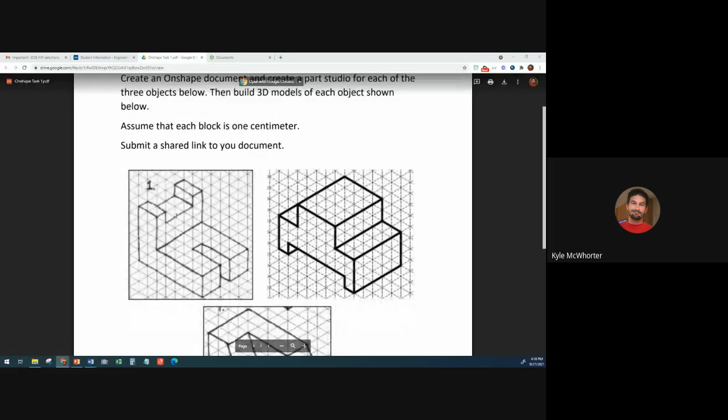So you're going to go to OnShape.com from your dashboard. You're going to select Create and Document. We're going to create a new document and call it Task 1.

So we have our first part studio right here. We're going to make this part, starting by drawing this L shape on the front view, and then we'll extrude it back. The dimensions are: the height is 5 centimeters high, the thickness here is 2 centimeters, and the width is 7 centimeters wide.

So we're going to come in here and start a sketch on the front plane. If we push N on the keyboard, it'll give us a straight-on or normal view. You can also push P on the keyboard to make all the original planes disappear. We're going to get the line tool here.

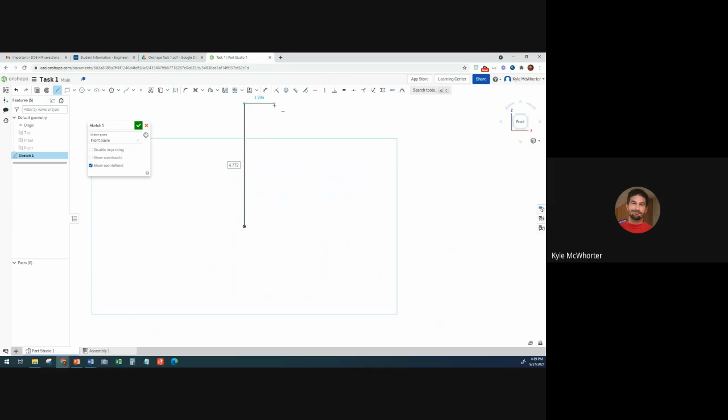I'm going to make, starting from the origin, sure that it's locked vertical. My height was about 5, so I'm going to go up till this thing says about 5. Then I'm going to go over about 2. Oh wait, I haven't changed my dimensions yet, so hang on just a sec. I'll make the L shape here.

Notice that you can get it to light up - that says it's the same level. Then click.

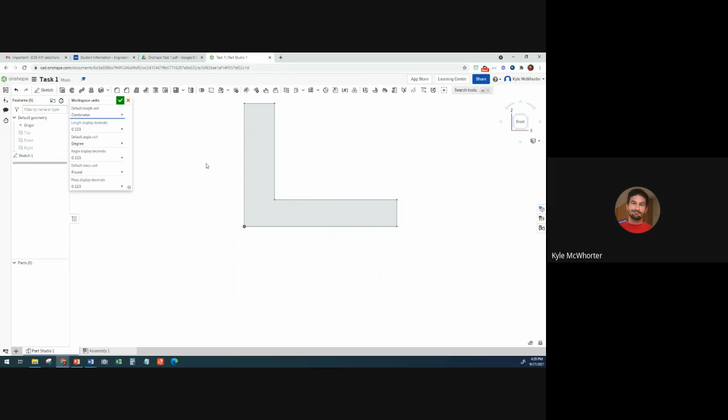Okay, so I'm going to go to this little menu up here and change my workspace units to centimeters. And then I'm going to use my dimension tool - oh, that kicks me out of the sketch. So I'm going to have to double click on sketch 1 to get back into it.

Now I'm going to put some dimensions on this. And if we look back, the height was 5, the width was 7.

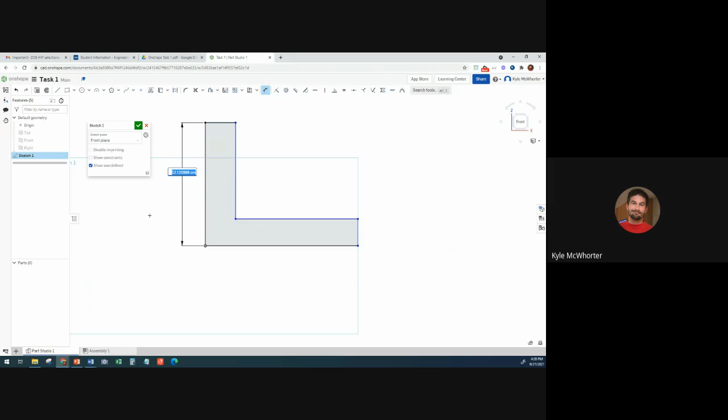So I'm going to get my dimension tool here. This one, I'm just going to select that, and I'm going to call that 5 centimeters. You can just push 5 and hit enter.

The width here was 7. And then that was 2 centimeters thick. This was also 2 centimeters.

And now all of our geometry has turned black to indicate that it's locked in place, fully defined. If you try to grab and move stuff, you can't move anything around.

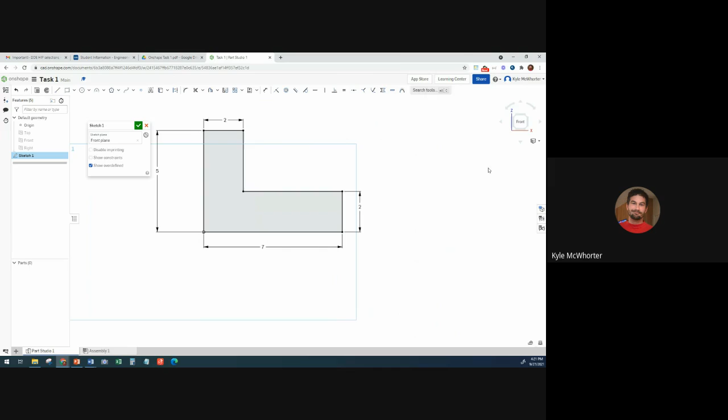We have the right dimensions, so we're just going to accept that sketch, and then we're going to extrude a depth of 5. So I'm going to angle this a little bit so that you can see. I'm going to accept my sketch.

Then you can pre-select if you want - maybe it won't let you. But when you first click on the extrude button, it asks you in blue right here, faces and sketch regions to extrude. So we're going to click in this area here, and you can see it starts to give it thickness. You can change the direction that it extrudes in by clicking on this arrow here or this arrow here. And the depth is going to be 5 centimeters. And then we'll go ahead and click to accept that.

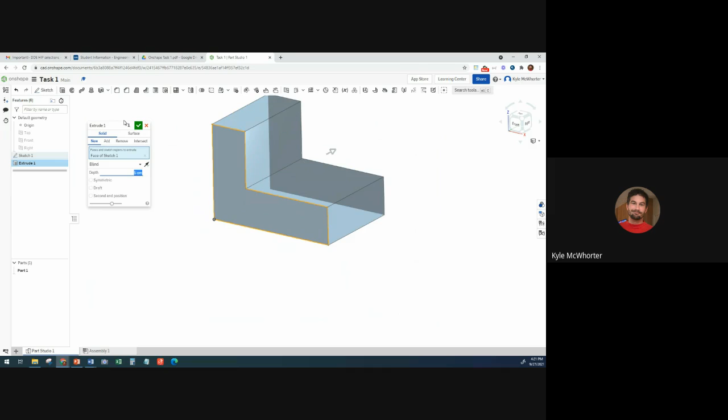So now we have the solid L shape, but we need to make this cutout at the top and this cutout on the side here. So for the cutout on the top, it's 3 units wide and 1 unit down.

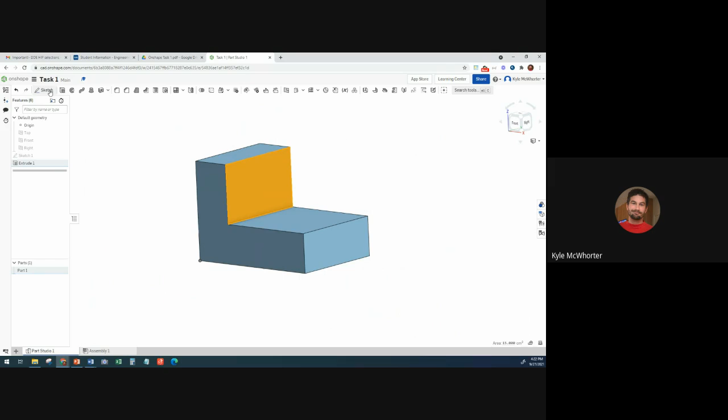So what I'm going to do is click to select that face right there, and then push sketch because now I can build a sketch on that face. I'll push N on my keyboard to get the straight-on view. This time I'm going to use my rectangle tool, corner rectangle, and place one corner up here, click, release, and then place another corner over here. Now I need to use dimensions to get that to look right. So this is 3 centimeters.

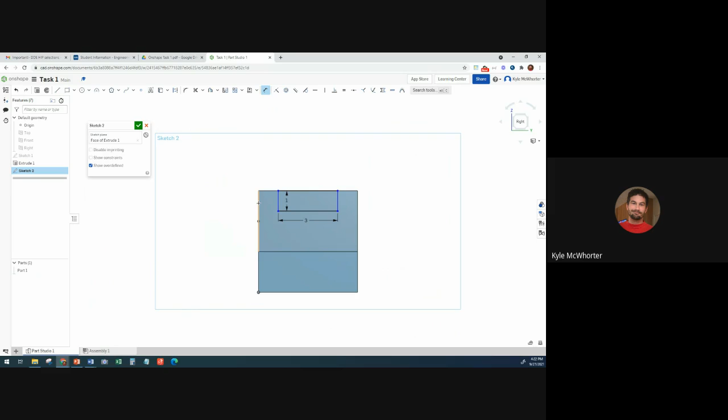This is 1 centimeter. Right now my rectangle's size is determined, but its location is not. So I can use a dimension to determine the location, and it's from here to there should be 1 centimeter. Now we've got our sketch fully defined here, so I can accept it.

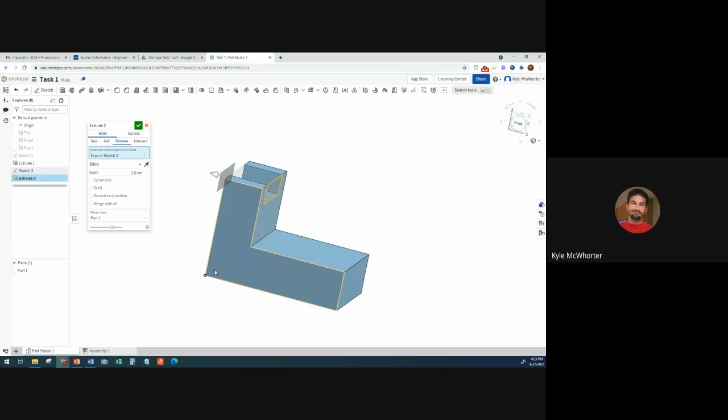I'm going to select that little square rectangle, select extrude. Notice it wants to build out, but I want to remove that. I want to cut it away, so I'm going to go like that, click on remove. Then instead of telling it how far to go, you can just tell it to go through all, and it'll just cut through whatever you have.

All right, now I just need to make this little cutout here. So that's 1 centimeter wide and 1, 2, 3 centimeters deep.

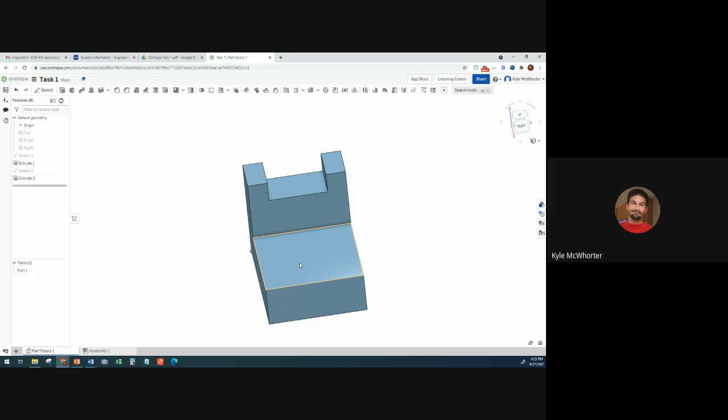I'm going to select that surface to make a sketch. Push N to get straight on view. I'm going to use my rectangle tool again and put some dimensions on it. The thickness is 1 centimeter.

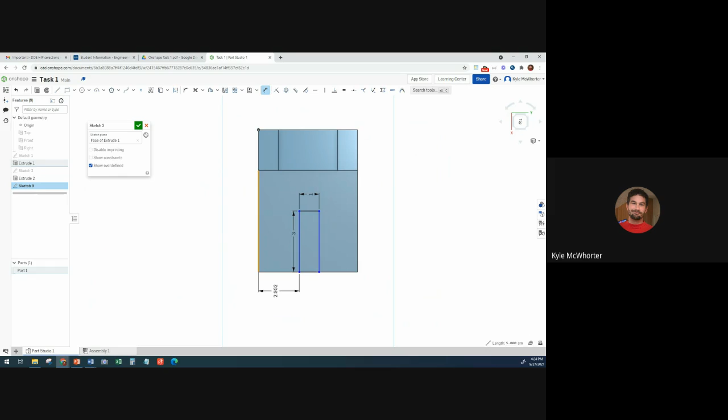That's 3 centimeters. Then I need to tell it where its location is - the size is right now, but I need the location. That should be from there to there, should be 2 centimeters. Now we're locked into place there, so I can accept that sketch.

Select that region, click extrude, change it to remove, through all, and then accept it. Now you see we've got our object there.

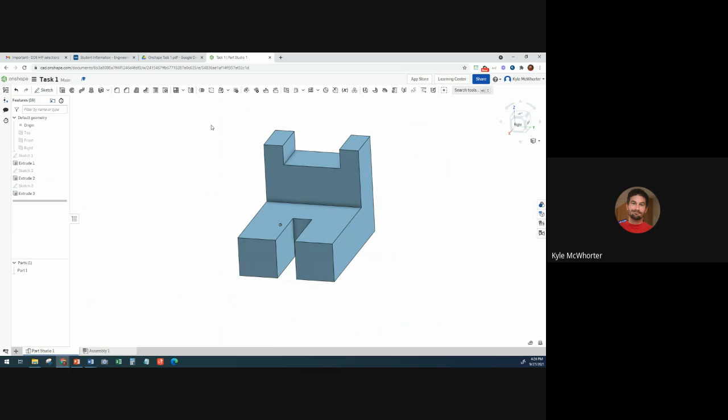Okay, the next one we're going to do is this guy right here. What I'm going to do is go down here and create a new part studio. So you click on the plus sign, click on create part studio, and now we have a new part studio to start in.

So I'm going to start by making this shape, and then I'll extrude it back 1, 2, 3, 4, 5 centimeters. I'm going to select the front plane and make a sketch on it.

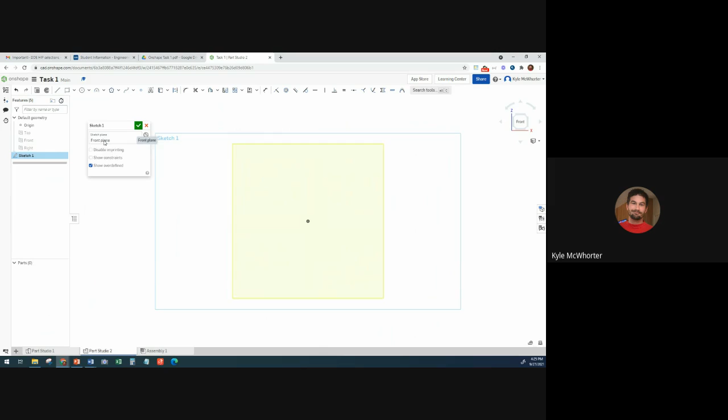N to get the normal view, P to make all the planes disappear. I'm going to get my line tool and starting from the origin, I'm just going to - oops, that should have been vertical.

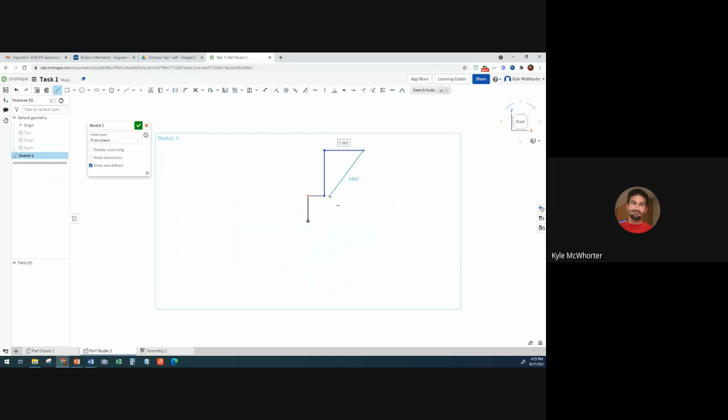Now I have it locked vertical. That's horizontal. That is vertical, horizontal, vertical. But you want this thing to pop up here so that it's at the same height.

We go up, over, down. It's okay if you get this little yellow stuff showing up, because that'll just make the bottom the same height. But you want to make sure that when you're placing this point that you don't make it vertical to that. This point here needs to not be straight below that - you don't want that point and that point lined up.

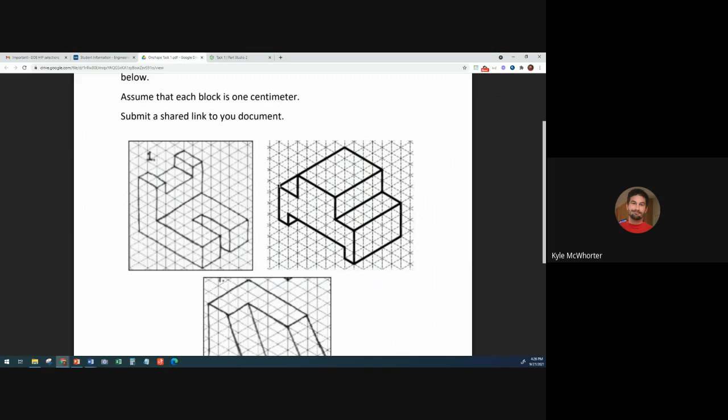So now we can start to put dimensions on this. Let's see, this height here is 3, and then 2 up there, 2 sideways there. So this one right here, I got my dimension tool selected - this should be 3 centimeters. This should be 2 centimeters. This should be 2 centimeters. That one's going to be 2 centimeters.

Notice what happens if I try to put a dimension right here - it already wants it to be 3 and it comes up gray. That's because we don't need to duplicate our dimensions. So I'm going to delete that.

Let's see, this down here, this is just 1 wide on each side, this little bottom part. So that dimension right here should be 1 centimeter. This one over here should also be 1 centimeter.

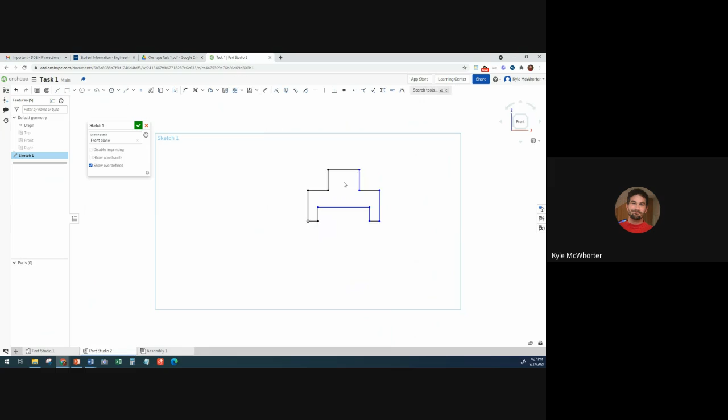You can tell that there's some stuff that's still blue, right? So if you're ever wondering what dimensions you need to place, you can just kind of drag points to see what moves. We don't have the overall width right now, and we can get that by putting the dimension on this top part. This is 4 across.

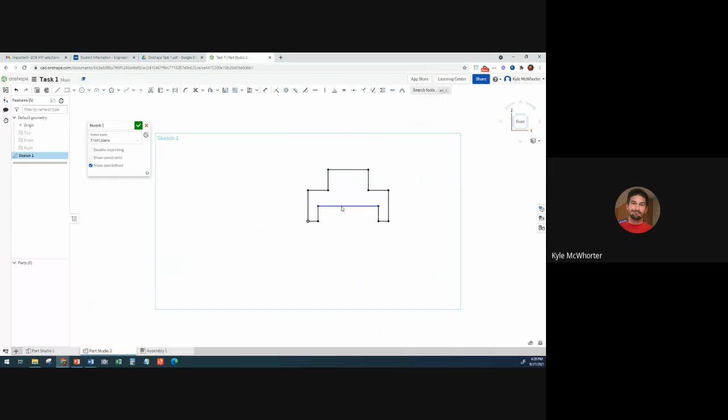Okay, so now let's see what moves. You can hit escape to exit any tool you're in. Notice if you try to drag here, you can't move anything. But if you drag this, the only thing that moves is the height of this. So we just need to put the height dimension on this.

So I'm going to come back over here. Oh, that's only 1 unit high. So dimension tool, that should be 1 centimeter. And now all of my geometry is fully defined. You can tell the color changed from blue to black.

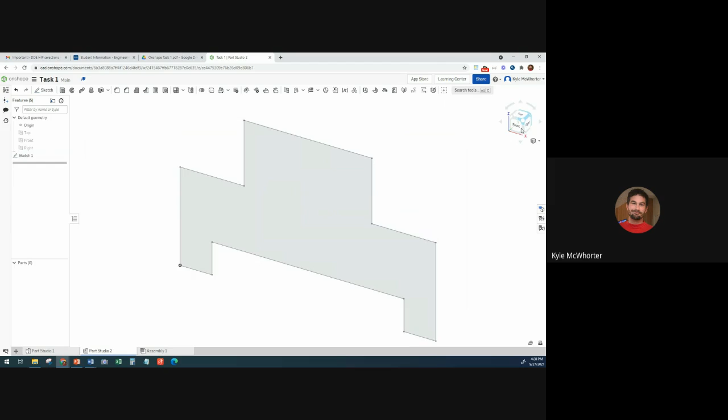So I'm going to accept this sketch. I'm going to get a little bit of a slanted view here, and then I'm going to do an extrude. I'm going to select this surface as the surface to extrude, and I'm going to make it extrude backwards. It was 5 centimeters. So there is our second part.

And now the last one is going to be this one. So I'm going to start off by making this kind of back half here. The overall width is going to be 8, and the overall height is 6. Then I just need to figure out where that slant is located. So I'm going to start off, well, I need to make a new part studio.

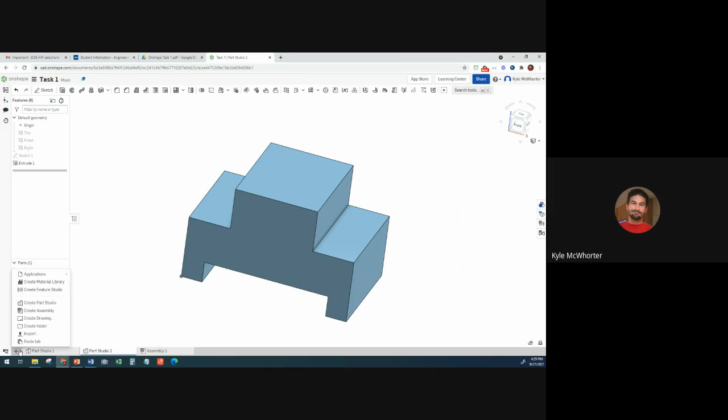I'm going to select, make a sketch on the front plane, and I am going to make a rectangle. I'm going to start from right here, make a rectangle, and make the height 6 and the width 8. So 6 centimeters tall, 8 centimeters wide.

And now I just need to figure out where that slanty part is. This slanty part goes from a height of 3 on the right side, and it goes 6 over from that side. So what I'm going to do is get the line tool, make a line, and just go from this side over to that side. Then I'm going to push escape.

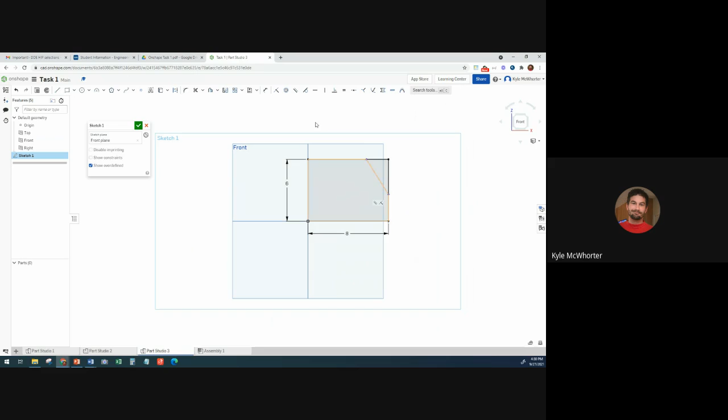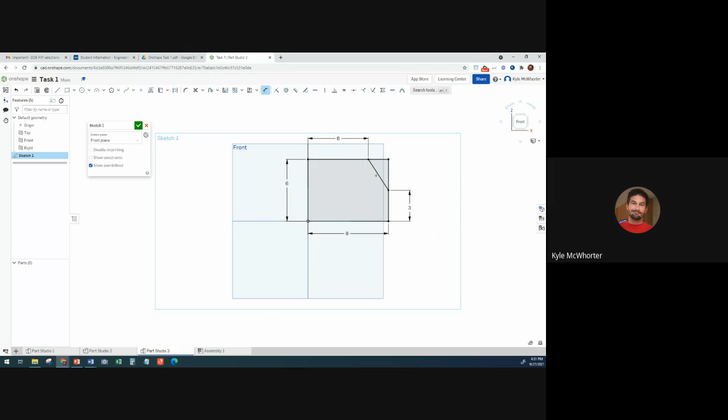And then I'm going to use my dimension tool. Now here, if I try to select that, it's going to try to select the whole side. So what I need to do is dimension from this point down to the bottom here, and that is supposed to be 3 centimeters. Then I'm going to dimension from this point to this side over here, and that was supposed to be 6 centimeters. So that's 6 centimeters. And now you can tell my sketch is defined. All of the geometry has turned black.

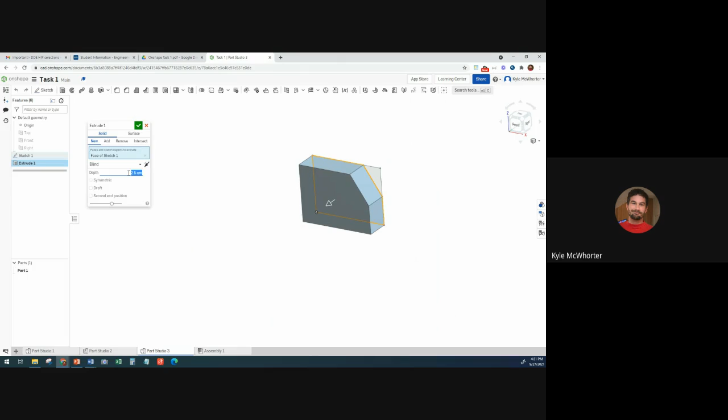So I'm going to accept that sketch. I'm going to push P to turn off my planes, get a little bit of a slanted view. I'm only going to select that portion, not that triangle. And then, let's see, what would be the thickness of that part? That is 2 centimeters thick. So 2 centimeters, boom. Now I've got this back piece here.

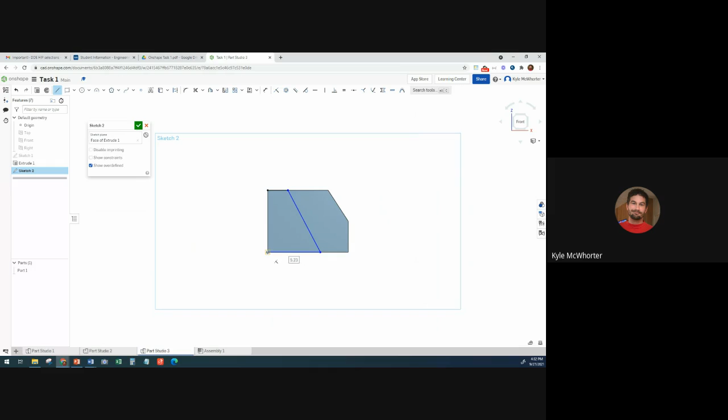Now all I need to do is add this part. So basically what I'm going to do is select this face and make a sketch on it. I'm going to get my line tool and make this shape here. So from here, we're going to go over a little ways, then have a diagonal down to there, then back to the origin, and back up to the top. I'm going to hit escape to get out of my line tool.

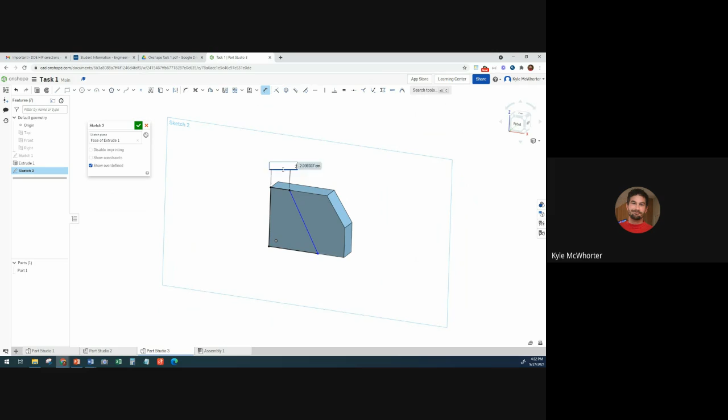And now I'm going to put some dimensions. I need this one here and this one down here, and that should be enough. So we got 2 centimeters here and 5 centimeters down at the bottom. 2 at the top, 5 at the bottom. I need my dimension tool. So that should be 2 centimeters. This should be 5 centimeters. And now we are fully locked in.

So I'm going to select that, and I'm going to extrude it 2 centimeters. Extrude, 2 centimeters. And there we go.